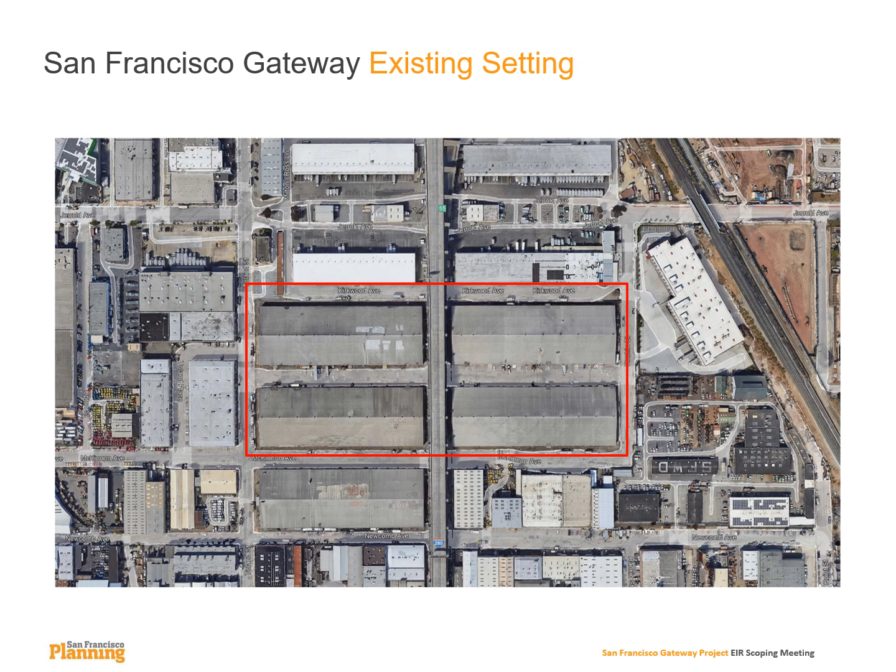The existing site is currently occupied by 4 single-story warehouse buildings originally constructed in 1943, totaling approximately 450,000 square feet of production, distribution, and repair space. The current buildings support a variety of production, distribution, and repair users, including automotive storage and fleet management, parcel delivery, and general food-related and temporary storage. Some of the space remains vacant.

The adjacent streets are unimproved with no existing sidewalks or other streetscape amenities. The existing site does not feature any landscaping or street trees.

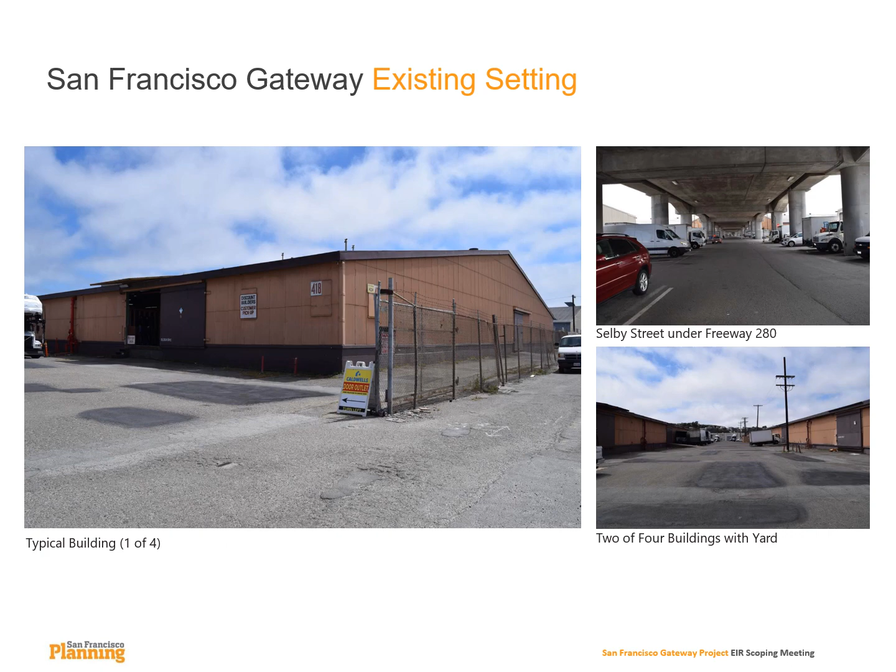The proposed project would demolish the existing 4 single-story buildings on site and would construct 2 new 3-story buildings to provide roughly 1 million square feet of new production, distribution, and repair space. The total building area, including internal circulation, support space, accessory office, and parking areas, would total approximately 2 million square feet.

Vehicular access to the project site and circulation around its perimeter would be altered from existing conditions to improve pedestrian safety, vehicle flow, and access.

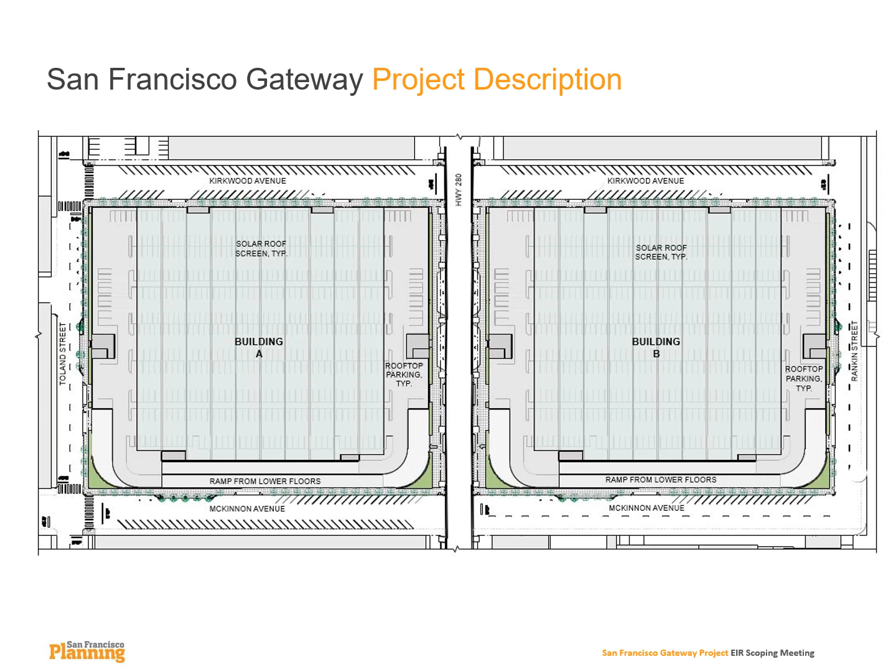The project proposes converting Kirkwood Avenue from a two-way street to a single-lane eastbound one-way street, and converting a portion of McKinnon Avenue between Toland and Selby Streets from a two-way street to a single-lane westbound one-way street.

Curb cuts and vehicle access points are distributed evenly along the building perimeter to move vehicles efficiently into and out of the buildings and minimize the number of vehicles waiting on the street to access the site.

The project proposes continuous sidewalks on all immediately adjacent street frontages, including Selby Street, to improve pedestrian safety and access around the exterior of the site.

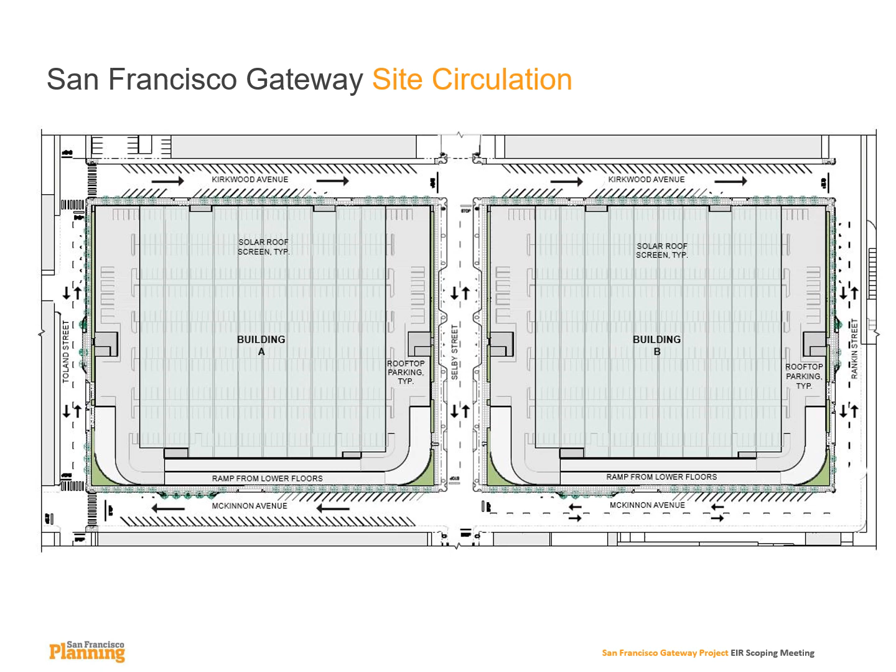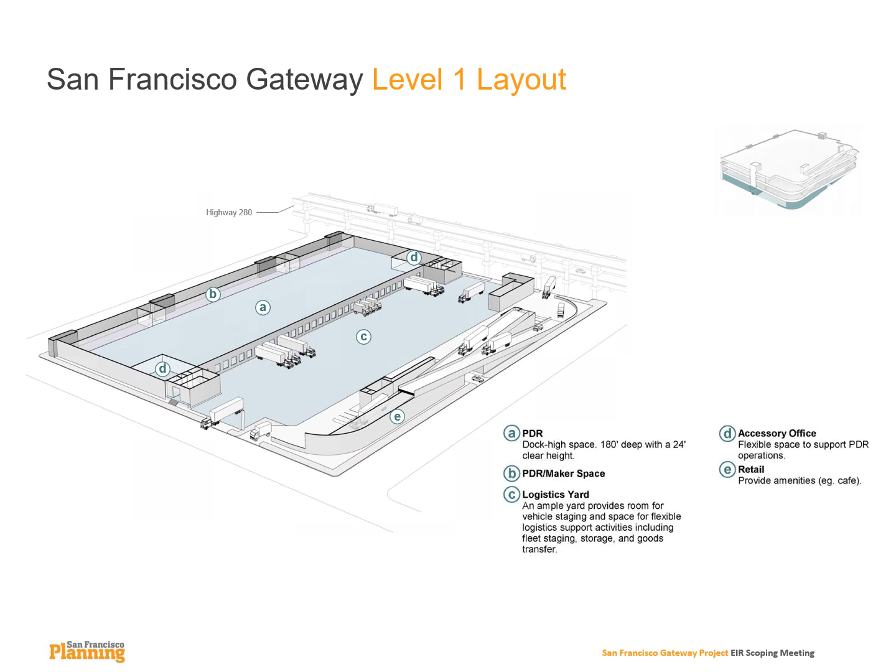The 2 proposed buildings would be approximately the same size, shape, and dimensions and would be oriented similarly on site. Each building would include 3 levels of production, distribution, and repair space.

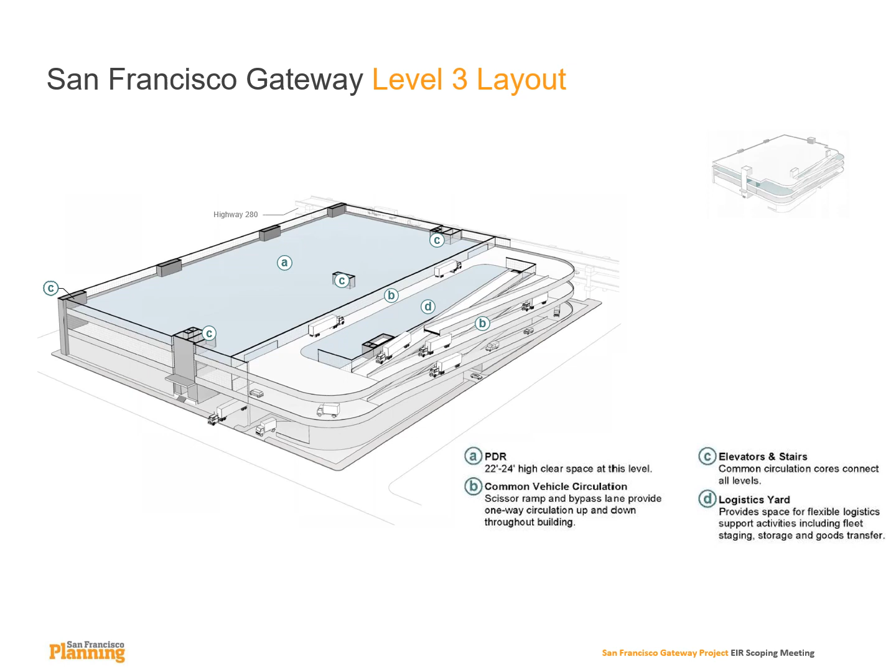And an active rooftop equipped with roof screening with an integrated solar array. The active rooftop would provide space for parking, storage, and vehicle or equipment staging.

Each level will have direct access to vehicle circulation and logistics yards at grade and elevated. A system of vehicle ramps provides full-service vehicle access at each level of the building.

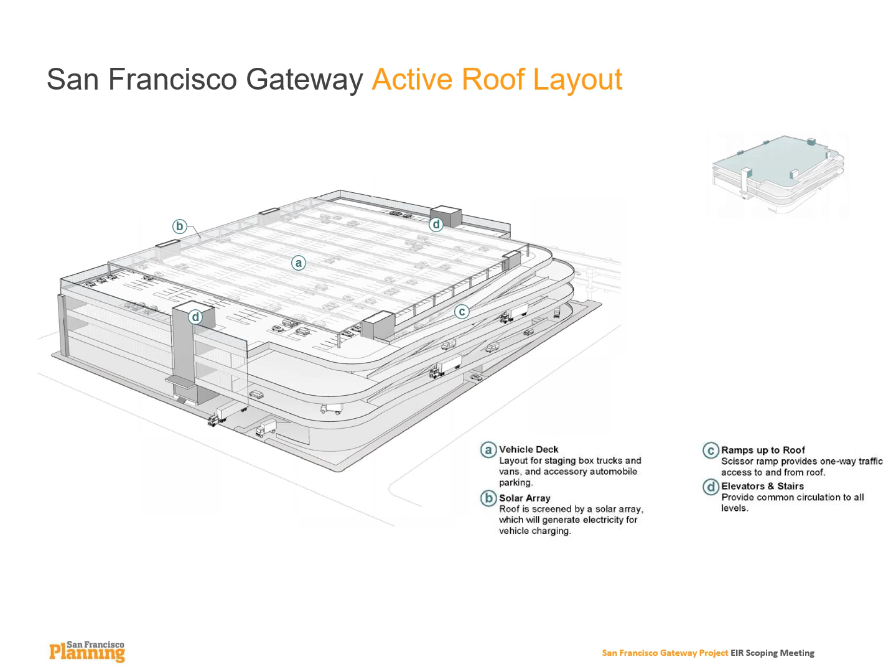Each building would be approximately 97 feet tall. Together, the 2 buildings would provide just over 1 million square feet of production, distribution, and repair space, including 35,000 square feet of dedicated ground floor maker space to support the production of goods, such as food and beverage processing, furniture making, and a variety of other similar types of uses.

An additional 1 million square feet of production, distribution, and repair support spaces, which includes logistics yards, vehicle circulation and parking, as well as 8,400 square feet of accessory retail space also located on the ground level.

The project features 1,166 vehicle parking spaces, 72 vehicle loading spaces, and 112 bicycle parking spaces.

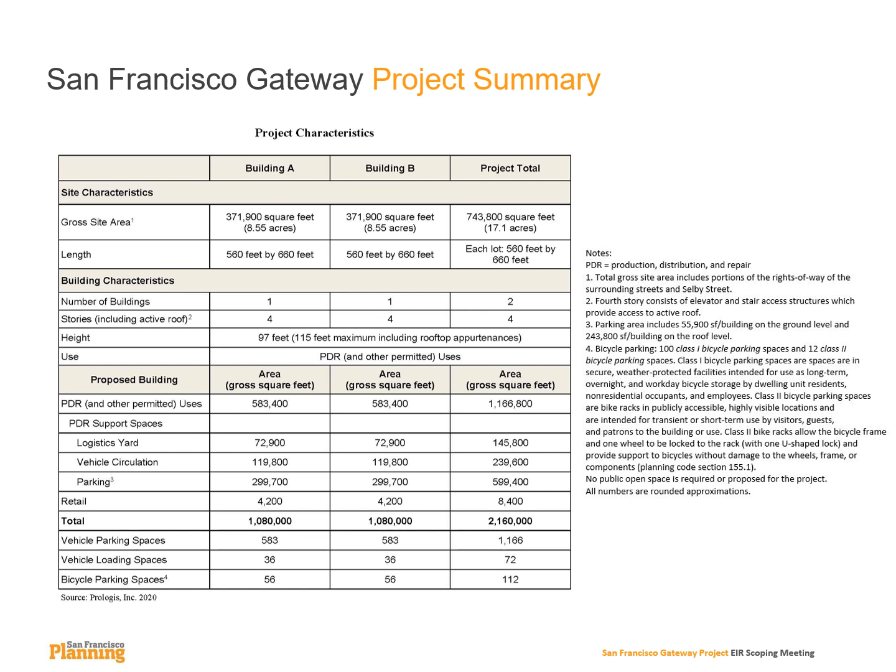The buildings are intended to accommodate a variety of users. No specific tenants have been identified for the project, and it is anticipated that the mix of production, distribution, and repair tenants would change over time.

For the purposes of this environmental review, the use mix analyzed consists of parcel delivery service, and wholesale and storage users as the predominant building tenants.

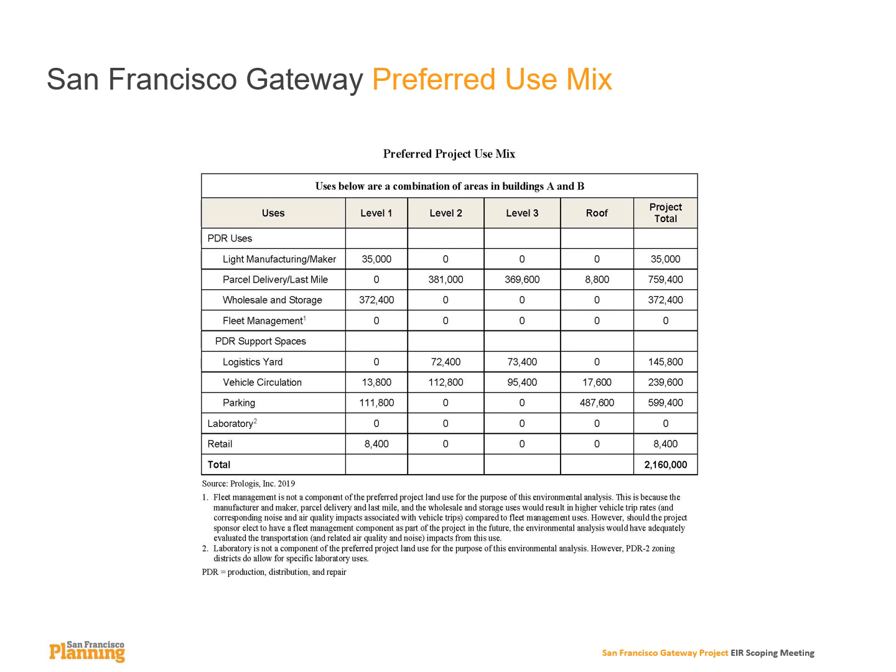The adjacent logistics yard areas support vehicle loading and unloading so that all loading and unloading activities will occur within the buildings. The vehicle circulation areas connect each tenant space to the system of ramps, which facilitates vehicles traveling up and down the building.

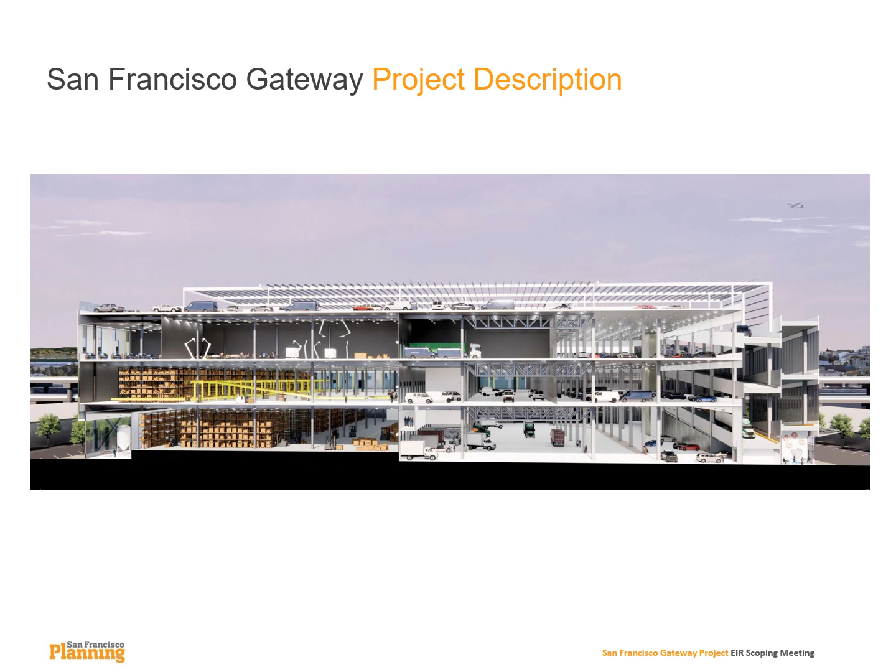The ground level of each building features street access makerspace along the entire Kirkwood Avenue frontage and retail space fronting McKinnon Avenue. Makerspace is a type of light industrial use and includes businesses such as food and beverage processing, apparel and other garment products, furniture and fixtures, and printing.

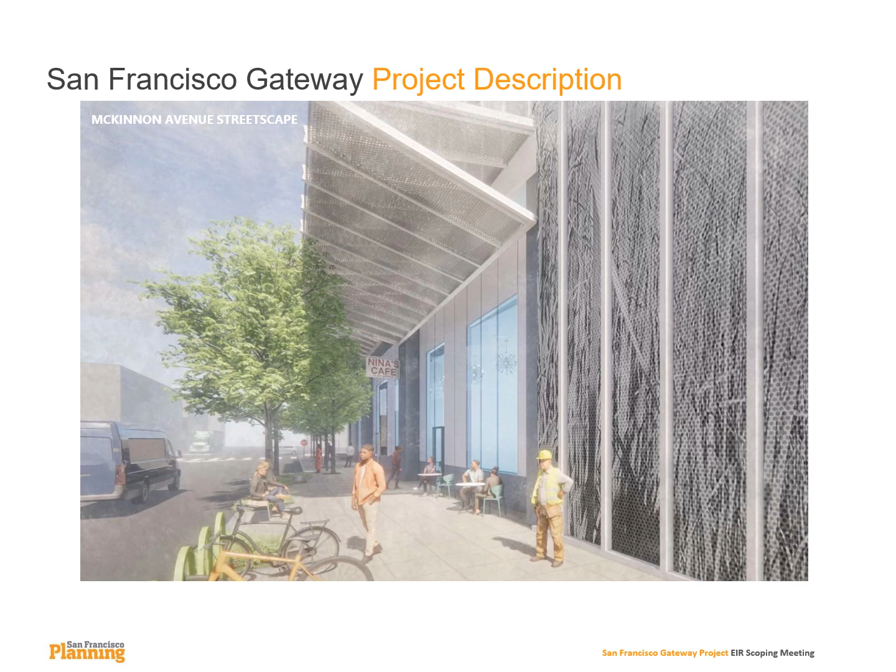Pedestrian entries and lobbies would be located mid-block on Toland, Selby, and Rankin Streets. Sidewalk bulb-outs at building entries and retail storefronts with additional streetscaping elements and bicycle parking would be provided.

In addition to the proposed project, the environmental review will also analyze an expanded streetscape variant. This variant comprises the same land uses and site plan as the proposed project, but proposes rebuilding the entire cross-section of the streets along the project perimeter to Better Streets standards, which define design guidelines for the pedestrian realm along streets where people walk, shop, sit, play, or interact outside of moving vehicles. The variant would include improvements from the center line of each adjacent street outward to the property line of the adjacent lots, including new roadways, curb cuts, sidewalks, street trees, and other amenities.

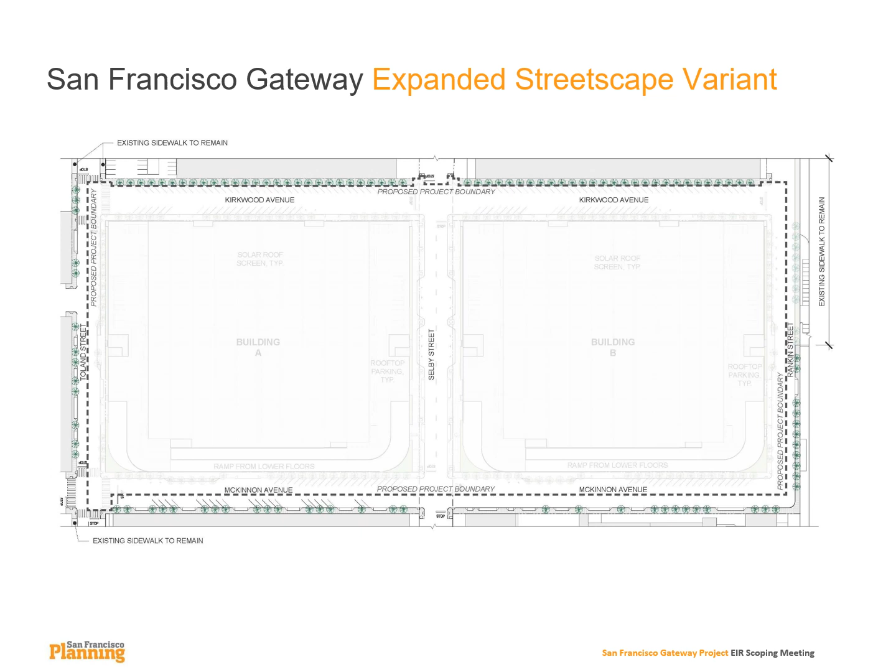Prior to approving the project, the Planning Commission is required to certify the Environmental Impact Report. The EIR is not a project approval. The project would require several entitlements and approvals from the city, including adoption of CEQA findings and a mitigation monitoring and reporting program, approval of planning code and zoning map amendments for Height District reclassification and to adopt a new special use district, approval of a development agreement, and permits from various city departments, including the Building Department, Public Works, and the San Francisco Municipal Transportation Agency.

Since 2016, the project sponsor has engaged in community outreach efforts to inform the public of the project and solicit their questions and input. Ongoing conversations have occurred with neighboring businesses, interested community groups, and various individuals throughout the process. Outreach efforts will continue as the project moves forward, and aspects of the project's conceptual design may change through the planning process. We will now discuss the CEQA review process and how the public may provide input.

The Planning Department is beginning the environmental review process, and we are seeking the public's input on the scope and content of the environmental analysis, specifically any potentially significant environmental issues, comments on the environmental analysis methods or depth of analysis, measures to avoid or lessen significant environmental impacts, mitigation, or alternatives to reduce impacts. This is also an opportunity to let us know if you would like to be notified or receive updates as the environmental review progresses. The Planning Department would like to be clear that the focus of this scoping process and scoping meeting is to seek comments on the environmental effects of the proposed project.